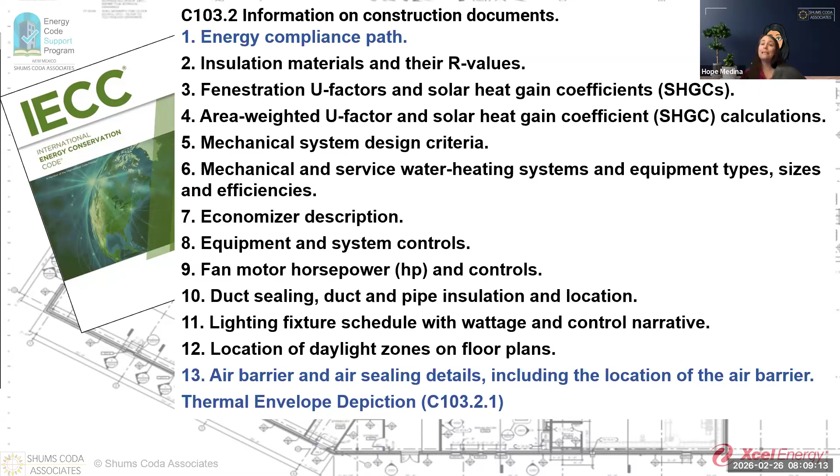All right, so here's the section that you all know I love and is near and dear to my heart, right? C103.2, because this is a section that talks about what needs to be placed on the plans. And a lot of times people consider this section as an architect section and the plans examiner section of the code, right? And the reality is, it's also there for when you're going out to do inspections, because if these items are not placed on the plans, they're probably not being done out in the field. And then you are not able to inspect for them. So while this does say information for construction documents, it is really helpful for you too.

And here are the items out of that section that really pertain to the fun and excitement that we've been talking about all month long. And that's our lighting, our electrical things. So number 8, I think, is often thought about as the mechanical ones, but we all know there's system controls that are required when it comes to the electrical and lighting side.

And then, of course, 11 and 12 are what we've talked about this month, just about all of the fun and excitement. We need those fixture schedules. We need to know how much wattage was designed. Is it permitted? Do we have enough? Do we have too much? Right? And our daylight zones. Troy had fun with you all last week talking about daylight zones.

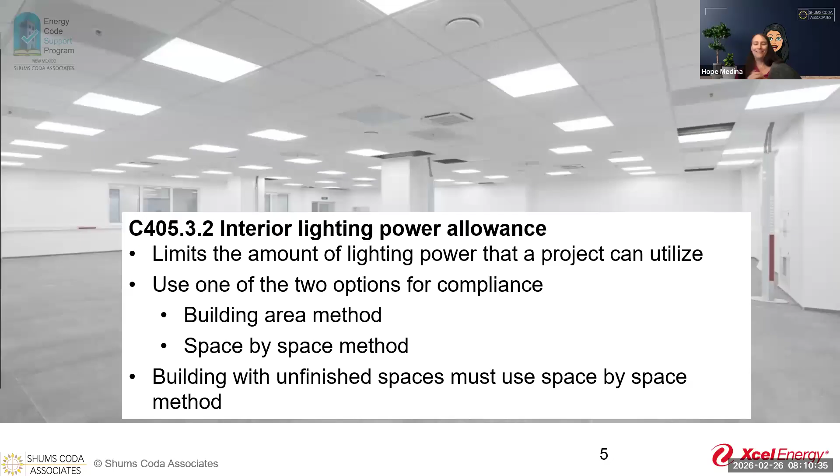So the first thing when we're talking about inspections, when it comes to the interior lighting power allowances, there are 2 options in there. But when it comes to inspections, whether they use the building area method or the space by space method, it doesn't matter too much to you, but what it does produce is this report if they utilize COMcheck to its fullest extent. They provide a report.

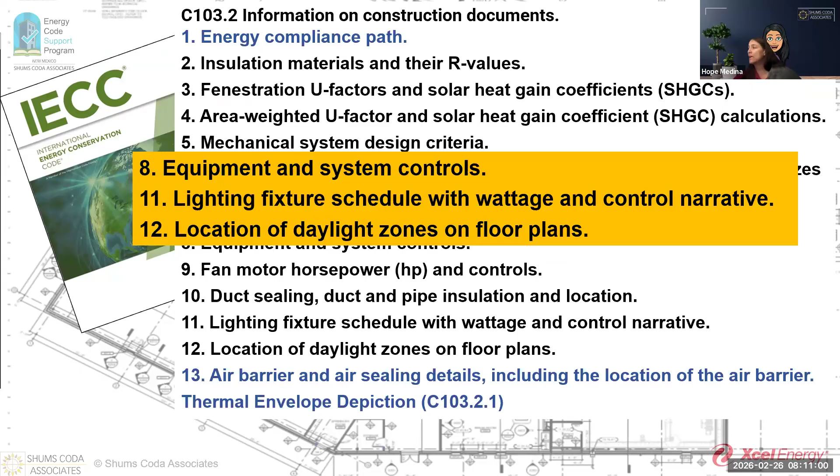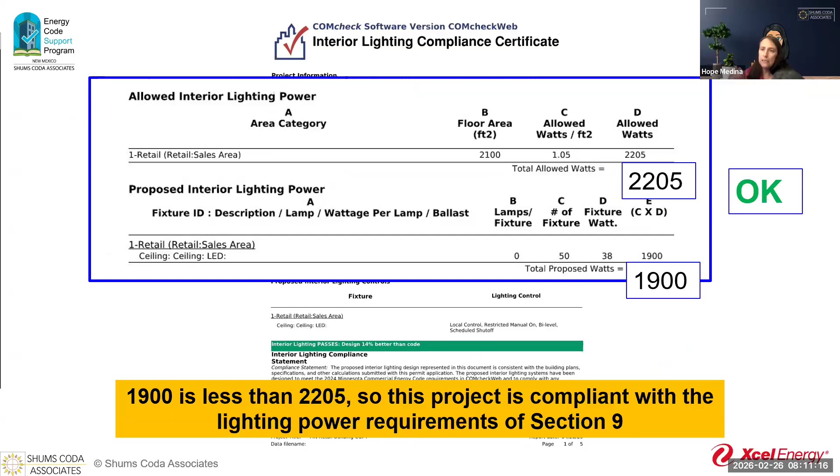If they don't provide a report like this, they are still required to provide you with the calculations. That's one of the items that's listed here. Number 11, lighting fixture schedule with wattage and control narratives. That's what COMcheck basically does for you in one easy to read report. So we know that we would look at this, right? All right, it looks like it's good. So this is something that's addressed at plan review.

But in turn, what it does for us as inspectors is now we have what we see on the screen here. And ultimately, what we would then do with this is it says in this room, I'm going to have 15 A lightings in there. When I go out there, what I'm doing for my amount of lighting is going through and counting how many fixtures are actually up in the ceiling or on the wall, wherever it ends up being placed, and verifying that that's what's going on out in the field.

And I know a lot of people are like, well, I don't think that that's necessarily an issue. But I know some of you have heard this story before. I had an electrical inspector who was like, okay, I got some stuff in the energy code, and he was trying to figure out how to incorporate that into what he was already doing. And he had a good plan going. So he went out there and he's like, okay, well, these plans show that there's 15. So he counted. There wasn't 15, there was more than 15.

So he started going around and he noticed that all the rooms had more lighting than what was shown on the plans. So he started doing his calculations, keeping track of how many of what fixture he had. He told the contractor, hey, I got to go back to the office because it appears you have more lighting and I don't know whether we can do it. So I'm not going to pass you and I'm not going to fail you. I'm going to go back and do a little bit more research.

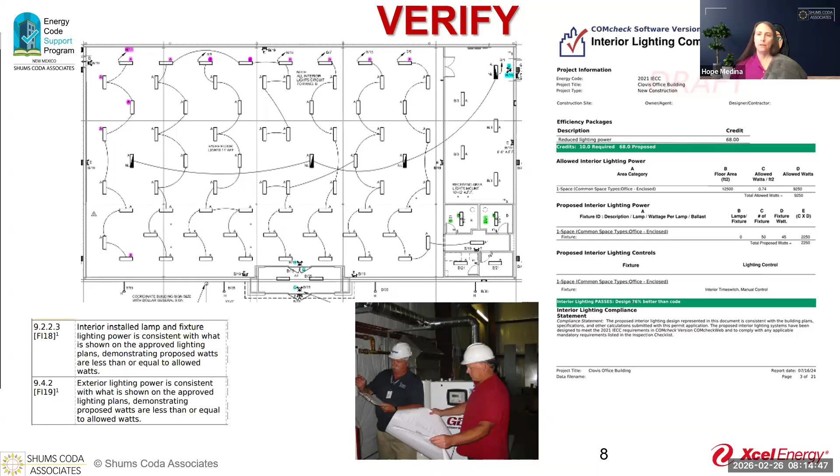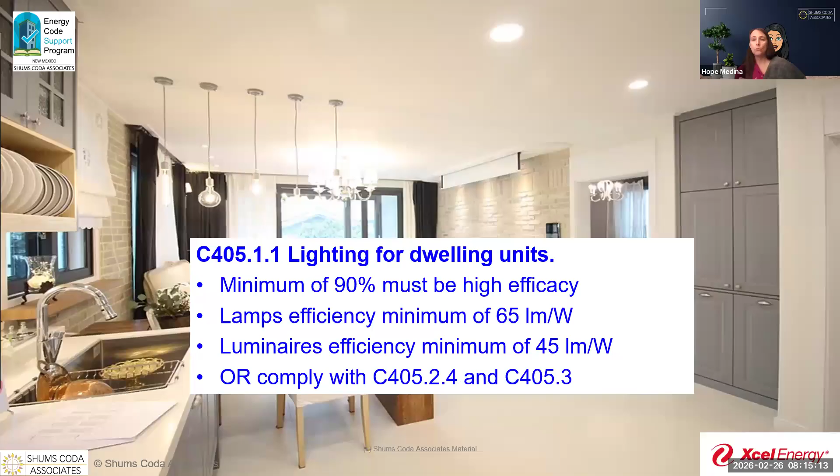All right. Now here's the really fun one. So we know that we're talking about dwelling units in commercial projects. So, your R2s, R3s, and R4s that are more than 3 stories above grade, right? In this instance, they have to ensure that 90% of their lighting is high efficacy per what the new criteria is in the code. So a lot of times people are like, well, what the heck am I doing? Am I just going around counting everything? And I think in the past, when we had that 50-50 split, there was a lot of counting going on. Now, it's not so much that you have to count all the light bulbs, right?

But what you may end up doing is obviously you're going to look through, and if you found lighting that wasn't high efficacy, that's when you're going to start paying attention. Otherwise, if what you're seeing is CFLs everywhere, some LEDs everywhere, then you would just kind of feel like, okay, we're good. But if you see an LED and then an incandescent, then an LED and then an incandescent, that's when I start worrying about having to count.

It's in the code. There's been so much with this, and the lighting industry has really taken hold of all of this. And, obviously, they don't want to produce something that they can't sell. And so that has helped our efforts as inspectors; while it's in the code, it's probably not as cumbersome or time consuming as you would think it would be.

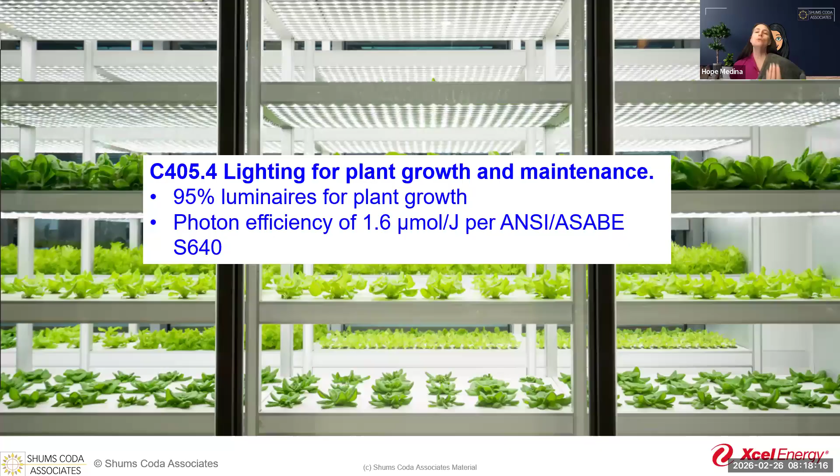Honestly, most of the time, that is what they're going to utilize, because as you can see on the screen here, often when they are growing plants indoors, it's dirt, plant, grow lights, dirt, plant, grow lights. So it's just this enormous stack, right? So they are utilizing a lot of lighting, and trust me, they don't want to spend an arm and a leg either. So they will be more than happy to be utilizing these. So again, while it is a counting game, I don't think that it's as much of a counting game as it may feel just looking at the code. Because once that information is out there, they're going to use the more efficient lighting, just as it did for regular everyday life.

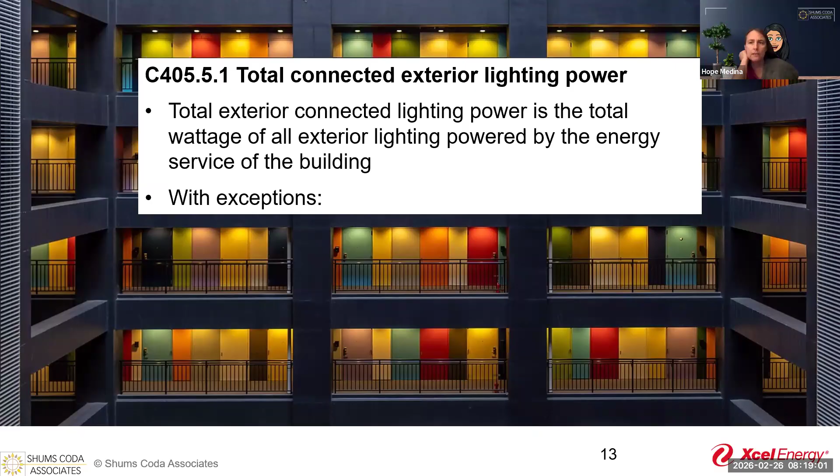Oh, hey, Troy, we got exterior lighting. It's kind of like our interior lighting concept, wouldn't you say? A bit, yes, except for the exceptions for stairs and egress paths. Yeah, our exterior lighting power density has a lot of exceptions, but I would say, just like Troy mentioned, there's some really common areas that all projects have, right?

They should all have egress. I guess I shouldn't assume, Troy, but I'm gonna go out on a limb. What do you think? Yeah, they should all have an egress out of there, and that needs to be lit up correctly. And that's that exception that says occupant sensors down to 50% in the egress path, then going back up. But with that, the lighting density per square foot based on how it's used, whether it's parking or entryways, that's huge on there as well. Absolutely.

Well, this again is where we have COMcheck that helps us to meet those requirements, right? It's a great tool to be able to have. So if again we look at a report, here's kind of what we're worried about and what we're looking at. So this, it's gonna actually work today. Nope. Okay. Oh, there it is. So here it says that they have 10 fixtures in their parking area. So ultimately, what we would do is come over here. We're outside. We can count that there are 10 fixtures, right?

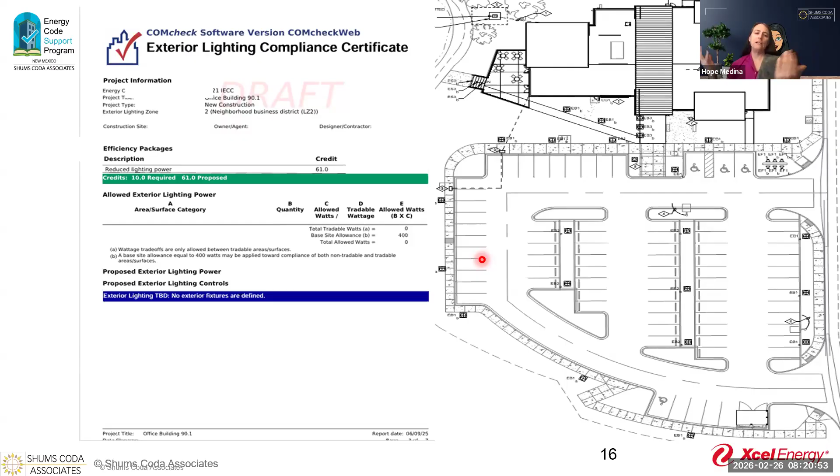So again, it's really fun to go out and count. It brings you back to your childhood. Brings me back to my childhood. What about you, Troy? Yeah, it makes me think of Sesame Street. One of these things is not like the other.

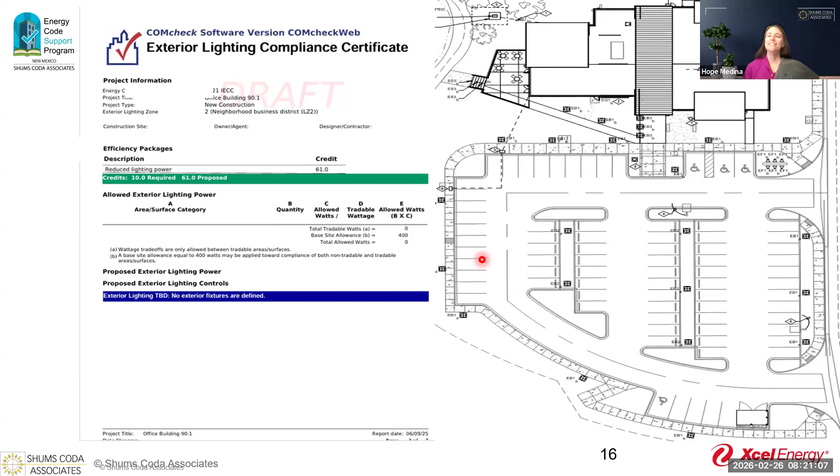All right, now here comes the lighting control criteria. As I mentioned earlier, this requirement for inspectors really does feel like a lot of stress. Now, I mentioned that we should feel like Christmas, right? The red book and the green book working together, or like red chili and green chili. I'm just saying. It would be great that the electrical inspectors are going out there and doing this, taking that load off because they're already looking at all these other things. But if it were to fall on a different inspector, maybe the electrical inspector is out for a week on vacation in the Bahamas, right?

Well, it's okay because the reality of this is when we're talking about all these controls, all you need to do is ensure that they are actually there. You don't have to worry about whether or not they work properly, but that they've been designed to meet the criteria listed in the code for their functions, because that's going to be addressed by commissioning. All of your lighting controls are required to be commissioned. So somebody else is going to verify that it shuts off 20 minutes after it's vacated, that it's been programmed for it. But it can't be programmed if it wasn't installed. So that's basically what we really need to do.

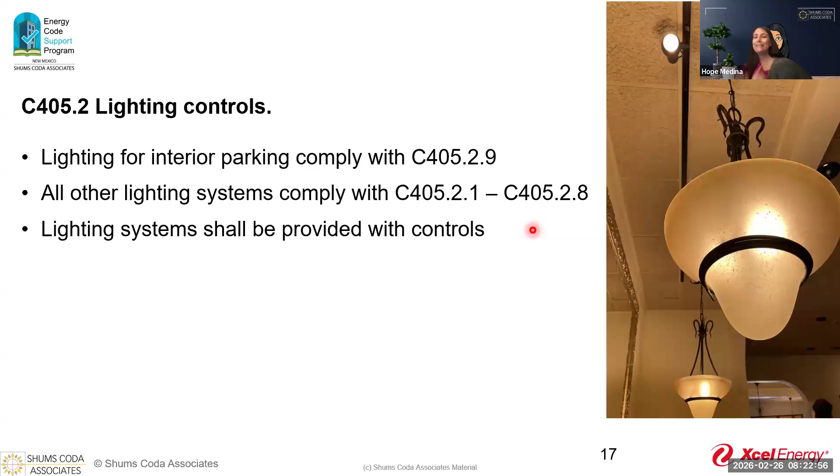All right. Troy, I'm going to ask you a really quick question. Are my slides still showing? Yes, they are. Okay. All right. Oh, there we go. Came back. Okay, perfect. I was trying to remember what the next slide was.

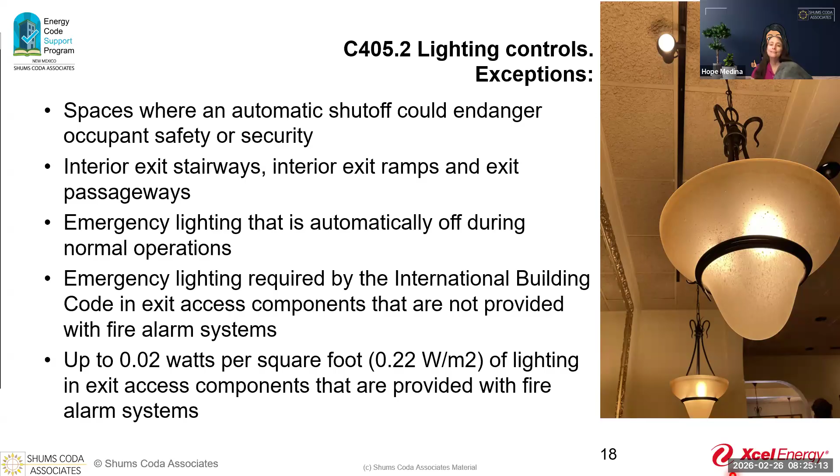So, oh, yay. We're just going to smile and hope that it works. There we go.

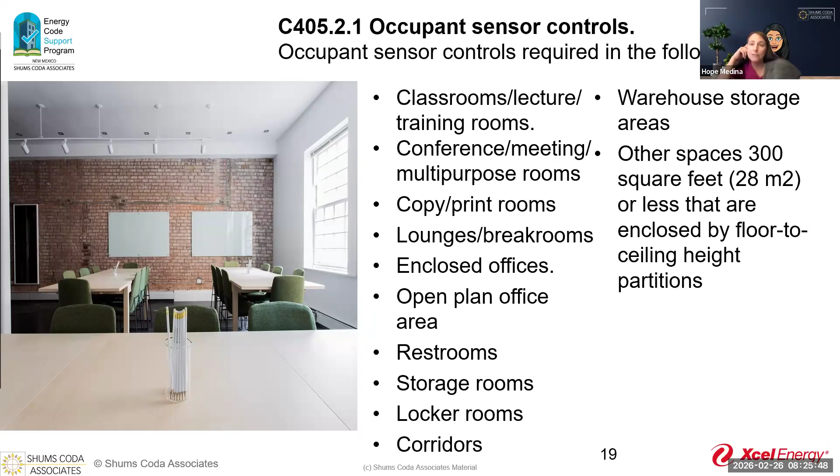All right, I alluded to occupancy sensors. Sometimes when we think of these, we think of occupancy sensors and that they turn on when you come into the room. And most of the time that's how they are. But they also need to have the function that they turn off, right? And that's what we are really concerned with. We want to ensure that all of these spaces have their occupancy sensors. And again, it's something that should be on the plans. And then what we're going to do is just ensure that they actually have been put in place.

Now, how they have to function is really kind of dependent on where we're looking, right? Anything outside of a warehouse, an open office, or a corridor, they're going to shut off 20 minutes after everybody's left. And then you're going to have a manual on or an automatic turn on that goes to that 50%. And then have a manual control that allows those occupants to be able to turn things off.

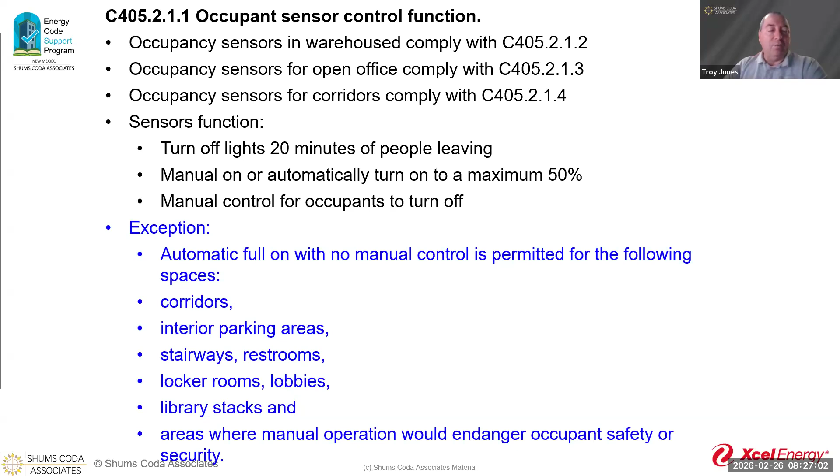What do you think, Troy? Have you had a lot of fun with occupancy sensors out in the field? A lot of fun, and the even more fun part is trying to find the manual overrides. Because depending upon where the building is and how it's zoned, I've had the overrides actually outside of the office areas. So you had to hit a button or turn a key on before you walked in. So those are things to remember when you're doing your inspections to verify that it's working.

Yeah, I didn't even think about that. See, Troy, amazing you are here today.

All right. Well, I said except for warehouses and open offices and corridors, so we might as well talk about them. So our warehouses, this is almost a fun one because if I were going out and doing an inspection for a warehouse, you have the aisles, the open area, and the aisles have to be independently controlled. So to verify that, I think it would be fun to run down an aisle and see what lights pop on.

And when I say run, we all know how well Hope runs. So that in itself would be fun for all those there to watch. So I'd be the entertainment for the day.

So again, that would be what I would look at because that lets me know that the sensors are there because they are functioning, right? They're turning on. They aren't going to probably turn off, but I'm not worried about them turning off because in those instances, more than likely, they're more than a few feet above my head, probably 20, 30 feet above my head in some instances for a warehouse. So to me, putting the fun in inspections, that's how I would go about it. I know that it turns on.

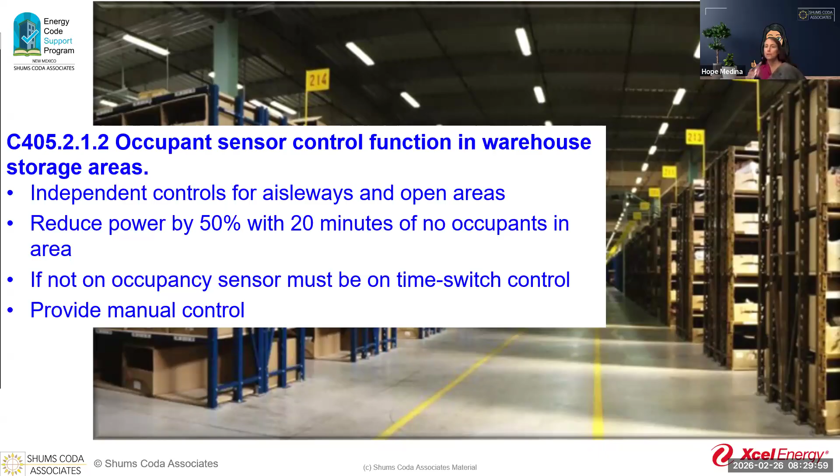Thank you. I get lucky once in a while. Oh, you get lucky more than once in a while.

All right, occupancy sensors. So when we're talking about open offices, that's always a fun one because a long time ago it said offices had to have occupancy sensors, and then the whole new fad was to have the open offices. So how do you deal with that? Well, let me tell you. If that space is less than 300 square feet, then you're going to just have the normal occupancy sensor requirements into it.

If that space is more than 300 square feet, now you are going to have an occupancy sensor that after 20 minutes shuts off the lighting for it. You're also going to have some controls, basically like a dimmer, so that it reduces down to 20%. It can't go less than that, so it's not shutting it off altogether. It's just reducing the amount of lighting that's in there once everybody has left that zone.

So with the zones, each zone cannot be greater than 600 square feet. They can make them smaller, like 100 square feet and 100 square feet and so forth. The designer can do that. They just can't exceed 600 square feet in those zones.

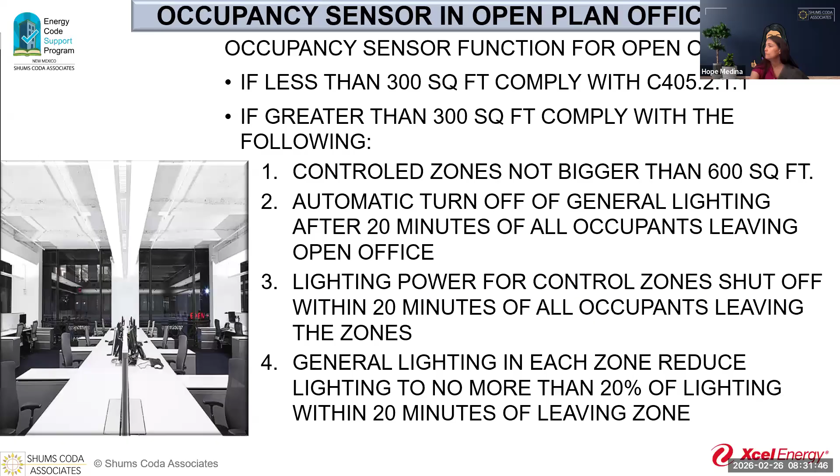Now, corridors is one that everybody has a lot of heartburn over. And don't get me wrong, I have a little bit of heartburn about it too. But what I will say is the lights don't completely shut off, right? They're only going to 50%, and they're going to be reducing uniformly so it doesn't feel too bad. Now, the lighting in the corridor is typically excessive. If you think about a hotel, that sucker is lit to the nines, right?

But if by chance it happens to have less than 2 foot candles, then that reduction doesn't have to happen. And that's because we're required a certain amount of foot candles for our egress, which you guys all know because we've been talking about egress today.

Feels like an egress Thursday. What do you think, Troy? I think it's an egress Thursday, and the question I always got is, what's a foot candle? Oh, so that's that funky shaped candle. It's really cool. The middle toe has the wick, and they say it's how many wicks per toe.

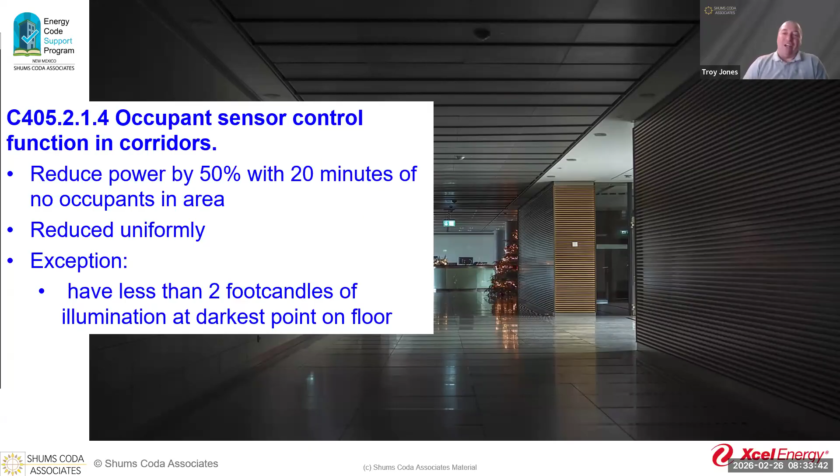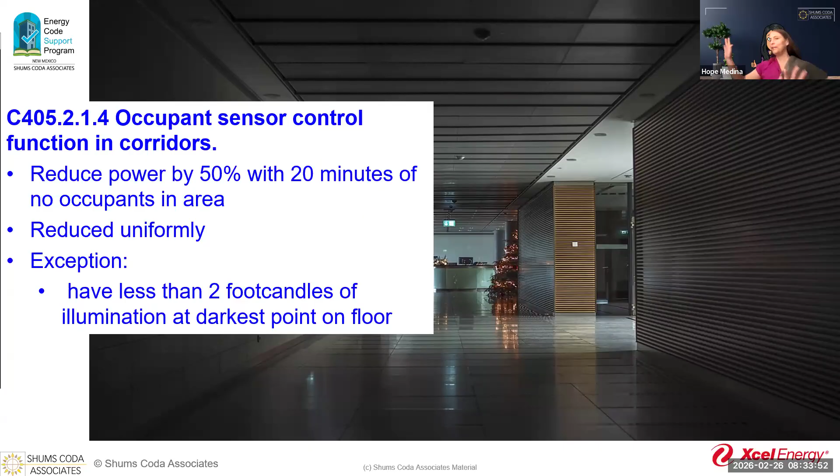See, we got somebody who wants the foot candle. Maybe we found our new calling in life. Foot candles. New side hustle.

All right. Getting to the time switch that Troy was referring to earlier. If it's not on an occupancy sensor, it's got to be on a time switch control, unless, of course, it's going to endanger the occupants. There are some exceptions for it. The big one to remember is the shops and laboratory classrooms. If you're doing schools, we want to make sure that lights aren't shutting off as they're using their Bunsen burner, or because they are going to follow our footsteps and get into the construction trades because they know how great it is.

And they're using the table saw. Next thing you know, they have created something beautiful, a 4-fingered hand. So now that foot candle has a 4-fingered hand that goes with it.

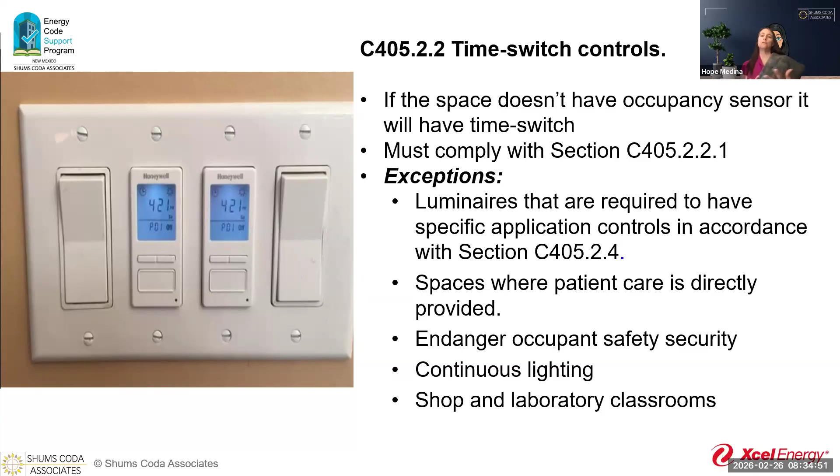All right. So again, this is one of the ones that people get, I don't want to say stressed out, but concerned about, when we talk about the requirements for time switch control. All of this should be listed in a sequence of operation on the actual plans. What you want to know is, is there a time switch control that's been installed in this location for the lighting system?

And so when I go out and I'm inspecting this out in the field, I always require for this part of the inspection the installer, somebody there that's going to show me where this was placed, and not so much that it was programmed, but that it is there and it exists, and where the override controls are going to be located, because as Troy mentioned, they're not always right in the room with you. A lot of times it's in a centralized location.

And I think we've seen those where it looks like a light switch, and then it has the little elongated rectangles, and it has some information that you would do with it. And then one is controlling the vestibule, one is controlling the office, one is controlling the hallway, right? So there might be one centralized location that's the control panel for multiple locations within the immediate area, right?

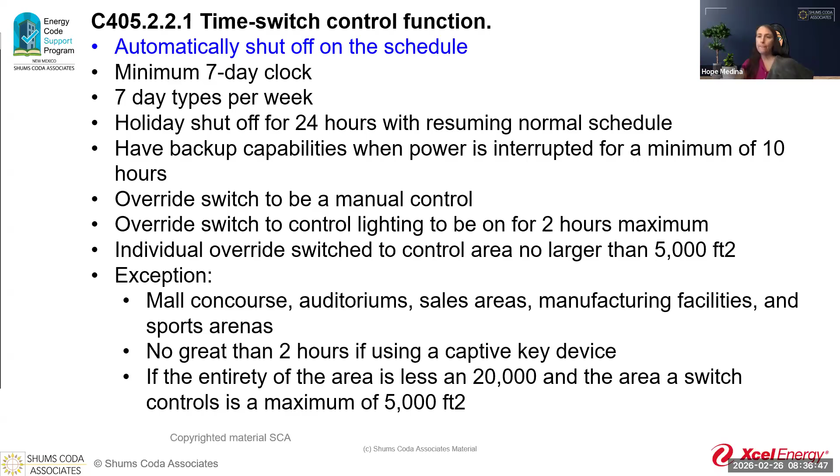So in this instance, since I have the installer, the contractor there, I say, where are your daylight responsive controls? Then they can show me here's where the control panel is. Well, I'm just going to call it a control panel, but here's where the controls are, and here's the sensors that are located up in the ceiling. Typically, I can see the sensors up in the ceiling. What I need to know is, where do you have the actual controls?

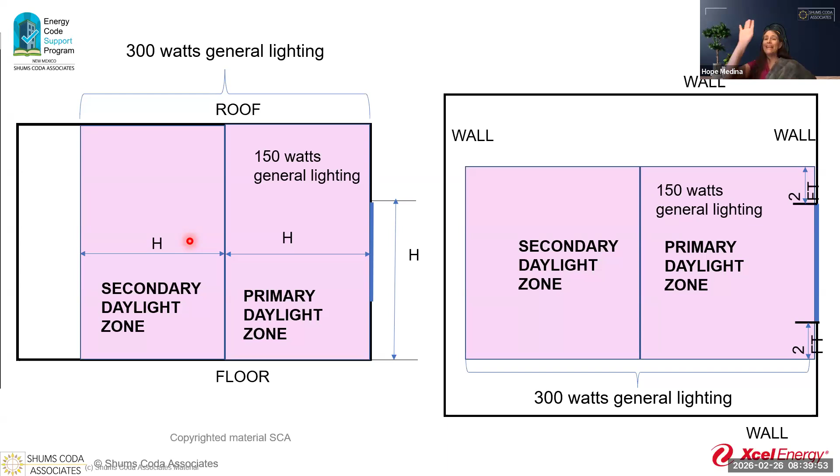Now, what we have on the screen is how they determine the sidelit, daylit areas. These are required to be placed on the plans. The reason I have this in here is to give a generalized idea of what they're talking about controlling: there's a primary and a secondary. So when you're looking at these controls and they say, this one is controlling this window and this one is controlling this window, okay, so we have primary and secondary. They have to be on their own devices, right? So we have to ensure that we have the controls for the primary and secondary. They're not combined anymore.

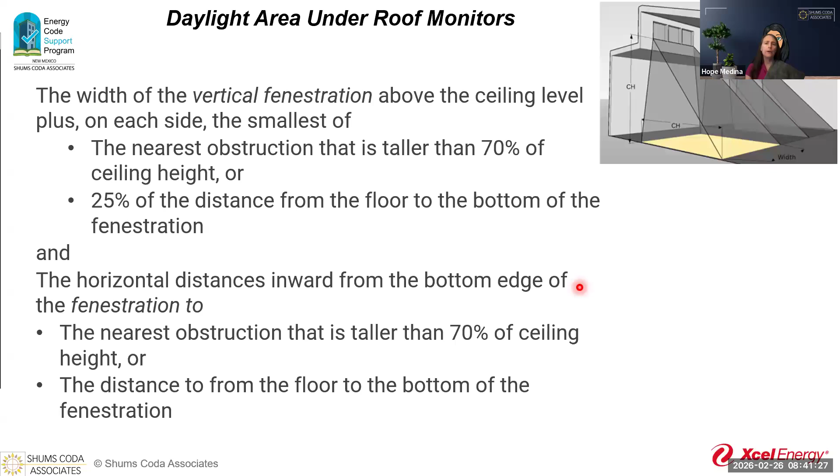And then I see we have a question. Can the controls be located so the office staff does not alter the settings? It still needs to be in an accessible location, as Troy had mentioned, and it has to be clearly marked. Typically, it's got to have the continuous dimming and then controls that are going to shut off all of the lighting. But it doesn't necessarily say that it can't be in a location where the staff would be able to alter it, but it would be kind of difficult for them.

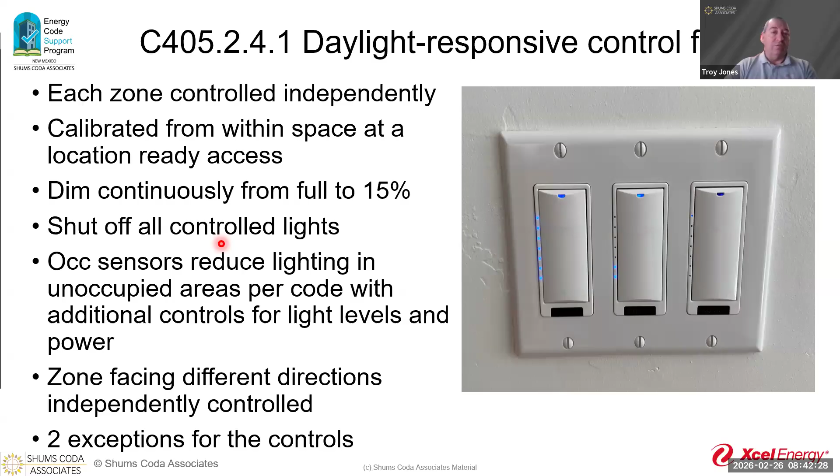On a lot of these, yeah, because the controls are computerized, they have an app that works with them to help facilitate setting these up. The older ones are analog, so you are able to make those adjustments, but the newer ones coming out are digital, so you can work them off the control system for the whole building. So even though they're located in the office for the occupants, they really can't mess with it. Yeah.

All right. So atriums. This is a fun one. A lot of people get a little... We've got Carl with a raised hand here. Oh, I'm sorry. Carl, go ahead. Have a chat.

You should be unmuted where you can ask your question. Okay.

Okay. The question is about whether the controls can be placed so that the office staff doesn't alter the settings. The issue comes into a competing code where accessibility standards require at least access to the switches within the reach ranges. So yes, they can be computerized so the settings are established within certain ranges, but the controls themselves still have to be accessible. Does that make sense? Oh yeah. I mean there are some criteria with that, right?

So you are right. We have a multitude of codes that all have to play in the sandbox together, and we have to figure that out. Now, what this code is saying is they made a conscious effort, because it used to say that it had to be accessible, meaning it just had to have the ability that you could have access to it. Now they changed it to be ready access. Pretty much everything is ready access. The reason is they want to ensure that those controls can be accessed without having to climb a 10-foot ladder to get there.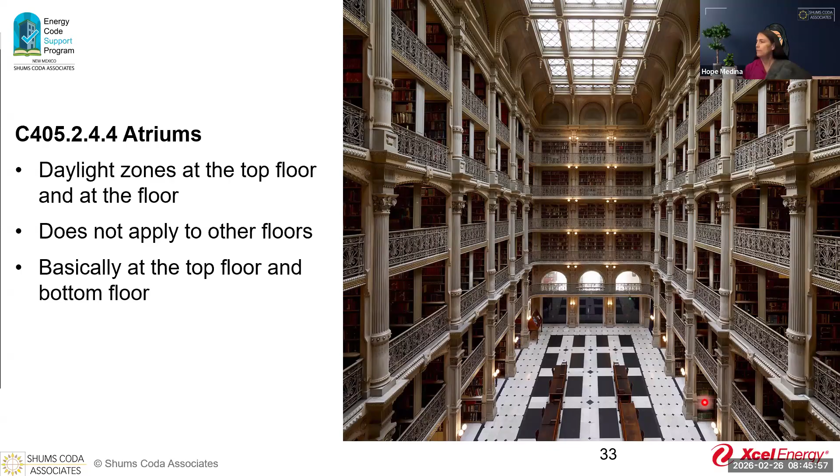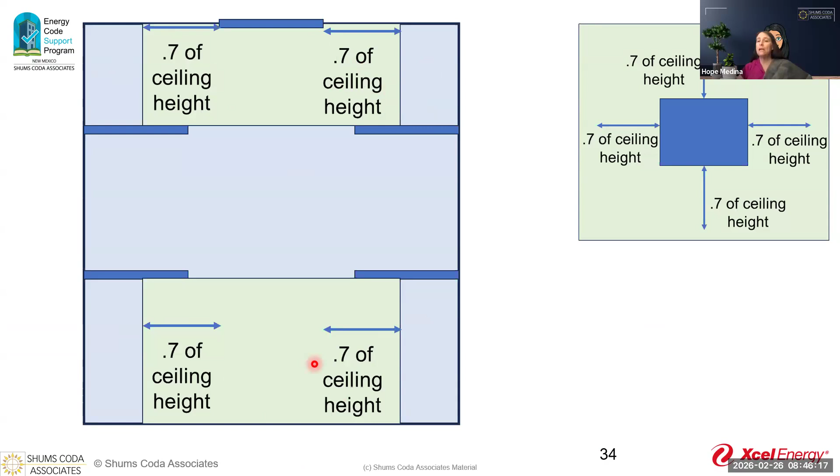All right, atriums. So this is a fun one. You have a very unique setup as far as the daylight zones for them. You have your daylight zone up here and your daylight zone down here, so you're going to have some sensors potentially up on the top floor and sensors down in the atrium itself to help monitor for those things.

Now, the specific application controls: while this is in the code, a lot of times it's not necessarily a separate sensor that has to be installed. These are now kind of built into the items that are required to follow C405.2.5, like display cases. Some of the supplemental task lighting is already utilizing it. The lighting for plant growth and food warming probably doesn't have it, and the task lighting for medical and dental purposes might not have those occupancy sensors.

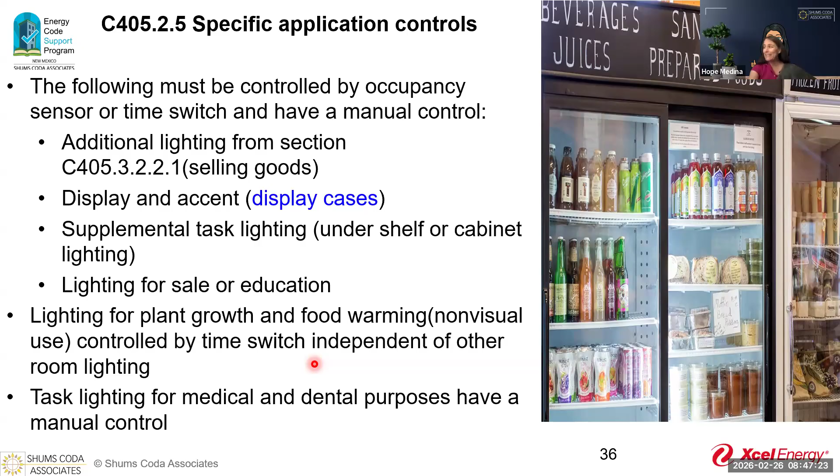But we do have some instances where it's starting to make its way in. So all we have to do is ensure that it's in there, and then the occupancy sensors and time switches are going to be addressed as far as functionality with your commissioning.

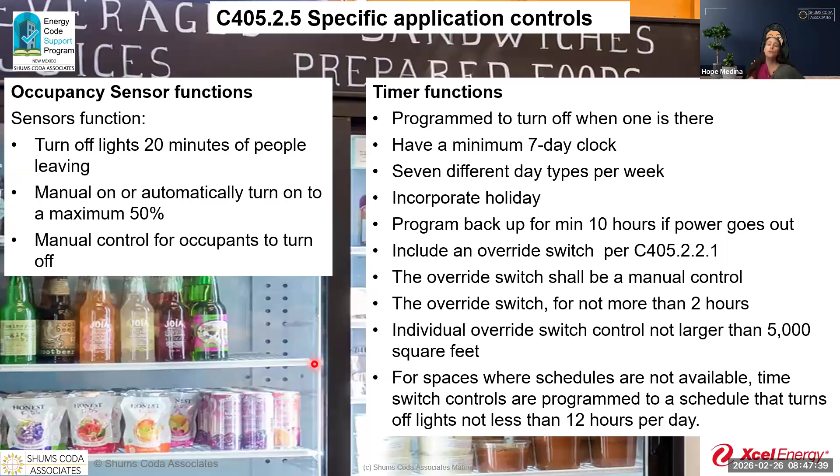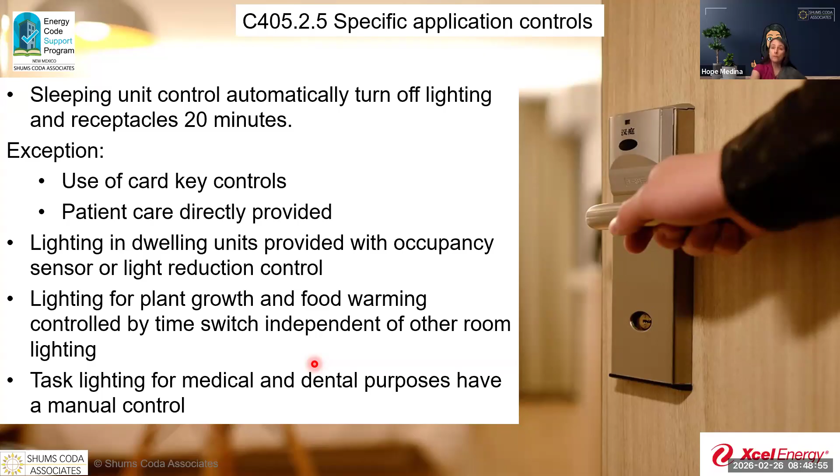There are further exceptions: the task lighting for medical and dental purposes, plant growth and food warming, and lighting in dwelling units, because that's already addressed in a separate section of the code. Then we have the requirement that you have to have manual controls. The nice thing is, I think we've all seen those manual controls, and it's not as cumbersome. That's probably the one thing we've seen over and over again.

I always like to put this one on here because remember it said you also had to have something at 50%. So I talk about how they label things. This is on, this is off, and they call it AV mode. AV mode was where every other light was on.

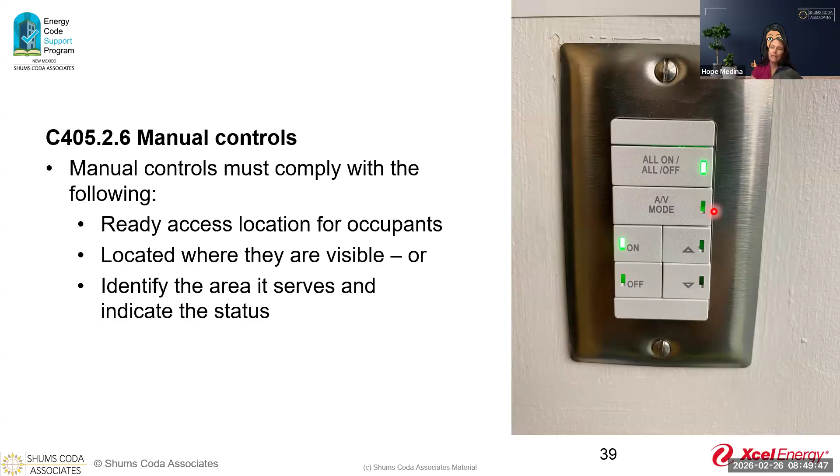And I thought that was actually kind of unique because sometimes it's how you present something as opposed to, oh, you must. So that's why I have that one in there.

All right. We can't leave the outside alone either. They need to ensure that they are meeting the criteria for exterior lighting controls. So the one thing that it says here is that covered entrances, vehicle entrances are exempt because they have their own criteria for this, so that it addresses things like eye adaptation, because I think we've all been outside, it's a beautiful day, and then we go down into the parking garage, and it is pitch black because your eyes are just not adjusted yet.

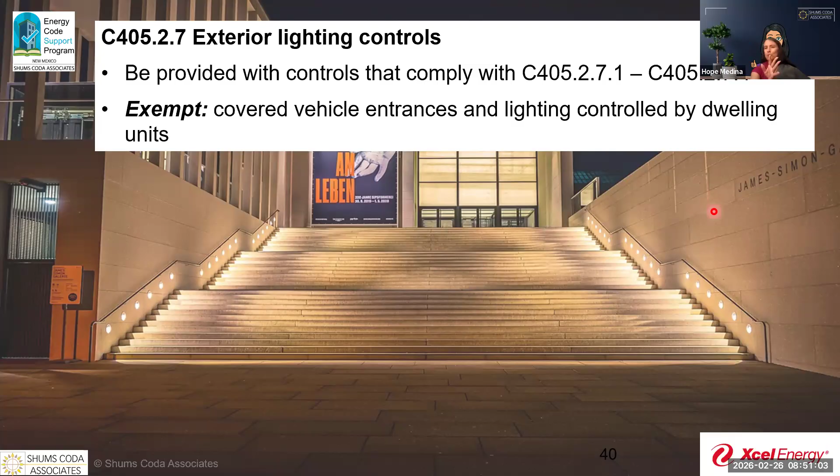And I don't know about you, but I put on my brake because I don't want to be on the news for being that person that hit somebody walking in front of the parking garage. So I close my eyes a second. I'm like, oh, amazing. Now I can see a little bit better. And so what they've done is they've created a way that you don't have to stop your car and close your eyes to adjust. It's allowing for an adjustment.

Building facade. Again, this is where it gets to be complicated because, I'm going to just ask by raise of hands. How many of you go out and do inspections at 5 in the morning to see if these lights are turning on or off? Anyone? Anyone? Bueller? Bueller? Nope, not even Bueller's doing it.

Carl does? Oh, Carl does. Oh, good job, Carl.

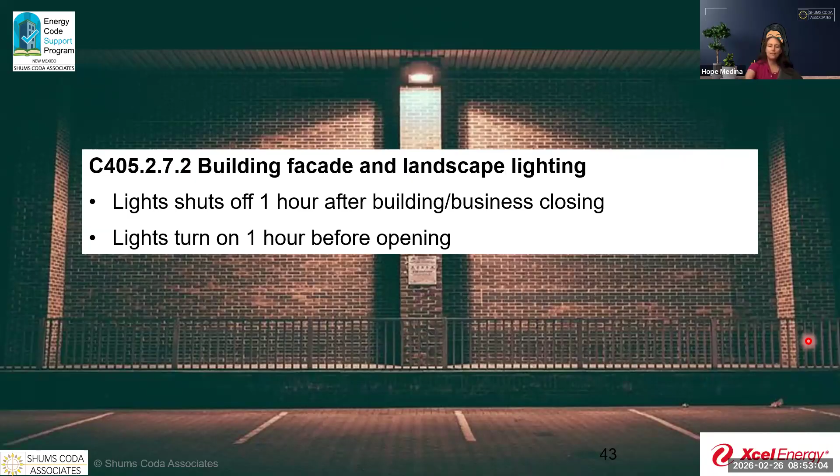Yeah, so this is one of those times that we definitely are going to have to rely on the fact that these are being addressed. Now, sometimes you might luck out that you could see it shut off because maybe you're driving home from work and you know that they're building and the idea was they were shutting off at 5. Unfortunately, you had to stick around because you had a council meeting and you could see at 6:20 that those lights are off. But otherwise, that commissioning agent is going to be your best friend when it comes to lighting. And I'm just telling you, lighting and electrical.

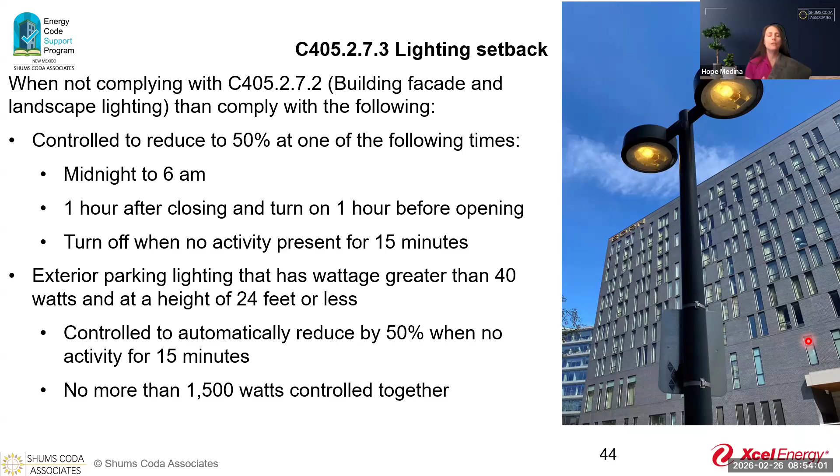Now all of this information is kind of complex, but this is where those plans are really going to play a huge role. And so again, you're going to ensure that whatever they say, if it's on a timer, if it's going to be on occupancy sensors, whatever it happens to be, you are just going to ask the question. This is how I address it. Ask the question, where is this timer located for this lighting? And they're more than happy to take you there because the reality is they want to pass their inspection and they don't want to wait all day on me either. If there's a way that we can work together to speed things along, they're more than happy to do it.

And then here's one that we all just love. Exterior lighting inspection is typically part of the punch list for issuing a substantial completion certificate. Oh, okay. Well, that's a very nice thing to know. I know for me, that was never an option. I had to go out and ensure that all of that was there. So that's kind of cool.

I have one that shows blue and so forth, but I can look around and kind of guesstimate that we are at 50% of all of these. And I can pretty much guarantee you are not going to find ones where 75% of the room is going to be controlled receptacles. You're probably going to find that maybe they're only at 40% of controlled receptacles. So that's one that I think is almost a slam dunk in the sense that it's so spelled out for anybody. I can look for a dot on a receptacle.

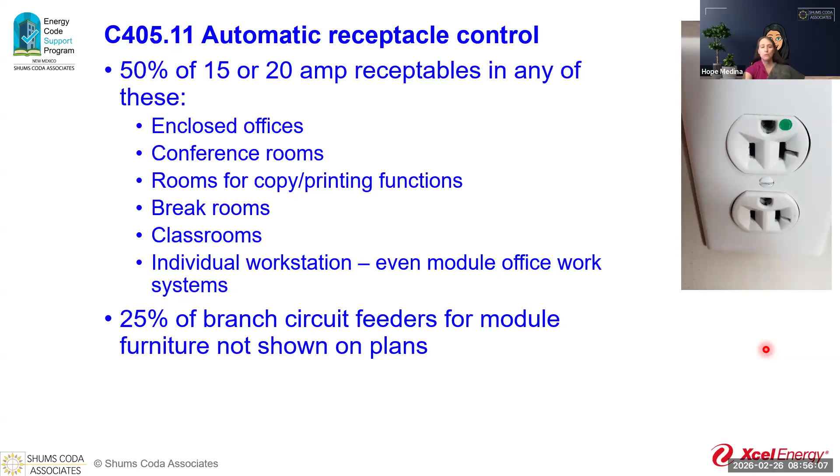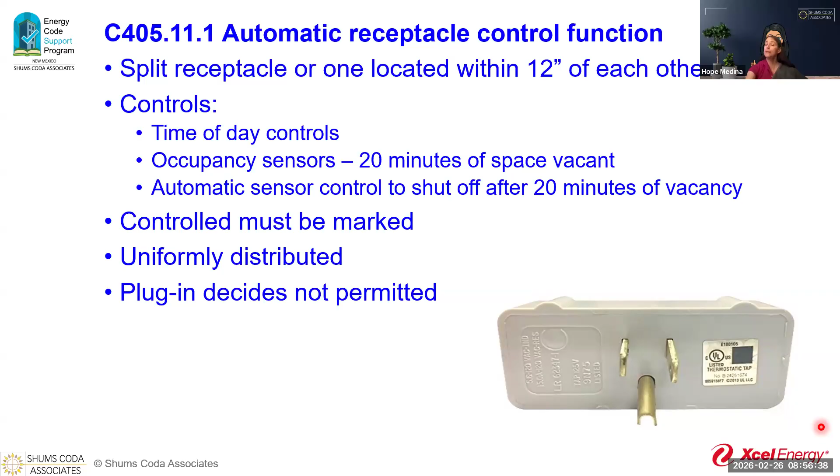I don't know about you, Troy. What do you think? Well, usually what I do when I walk in on those is I ask the contractor, "Hey, how did you signify which one of these is controlled and which one isn't?" That way, I get them to help me out: see, there's one over there, there's one over there. It's blue, it's green, it's orange, or I've actually had the outside trim plates be a different color. Oh, yeah. I haven't had that one. That would be a good one.

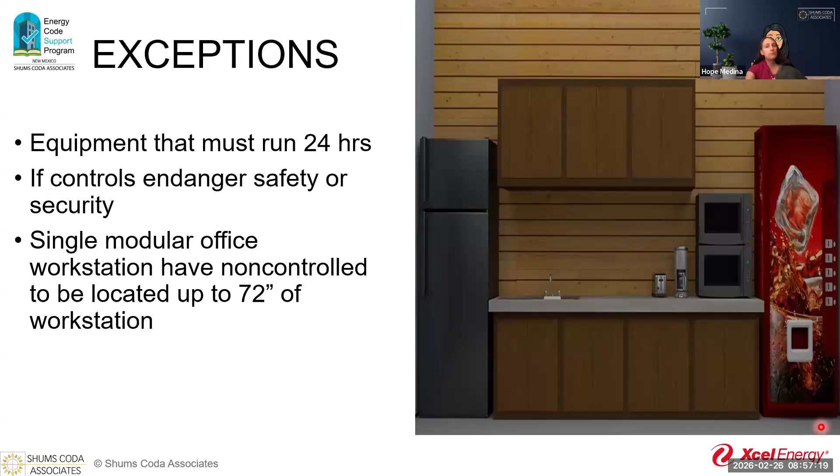Now, the one thing I do want you all to remember is there are some exceptions to this. So, break rooms, I think it would be really poor judgment to have the refrigerator plugged into a controlled receptacle, or even the vending machine. And anybody who knows me knows it would be poor judgment to have that coffee maker placed on a controlled receptacle. So just keep in mind there are some exceptions to all of this, because that's just the reality. And like I said, lovely green dot. This one's green. I should have put in the blue dot so that everybody could have seen that there are different colors out there.

Now, one that most people probably are not exactly aware of is that elevator cabs actually have criteria for energy efficiency. This again is something that is going to be placed on the plans, which often refer to the spec book, quite honestly. The luminaires in an elevator cab have to be not less than the 35 lumens per watt. The ventilation fans in an elevator without air conditioning can go all the way up to 0.33 watts per CFM at max, and then the controls are going to de-energize everything when it's been inactive for 15 minutes. So often a lot of this is looked at with the commissioning agent, and a lot of it is looked at with the plans examiner, because they're going to catch this stuff at the beginning.

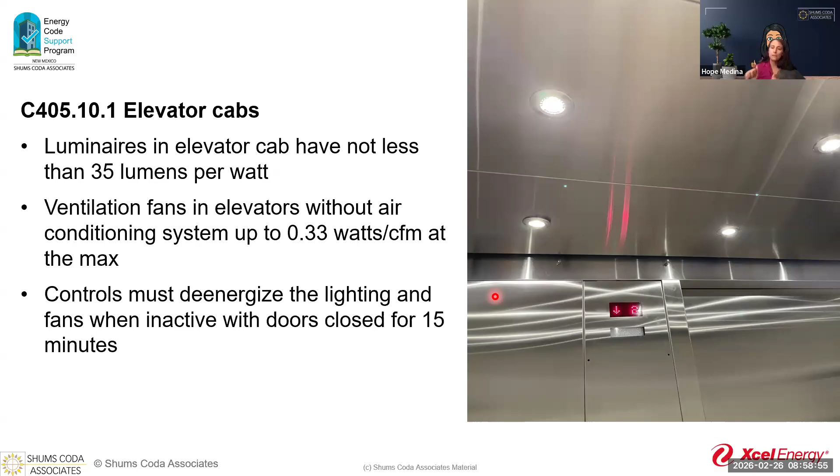And quite honestly, elevator cabs now are kind of, I don't want to say prefabricated, but a lot of this is already being done with them. So some of it is stuff where you're going to just go out there: okay, so what do we have in there? Great. And we would kind of call it good there.

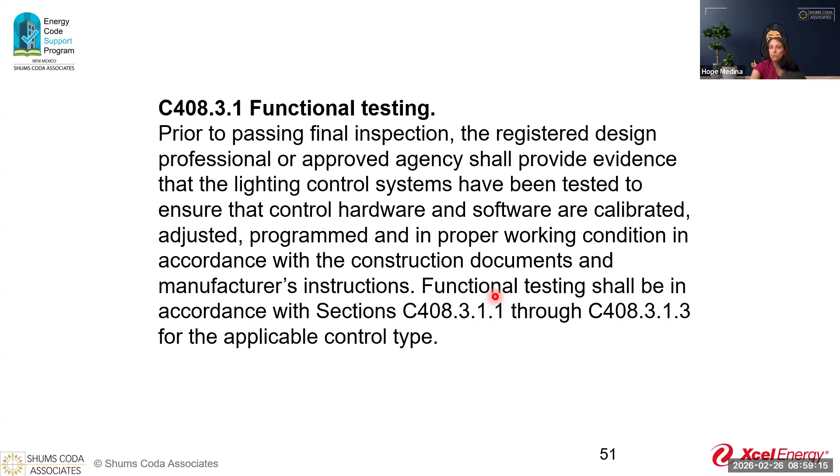Now I know we're getting to the very end here. So here becomes the fun thing: whose responsibility is it to inspect what? This is where we want to ensure we understand, as I've alluded to and Troy's alluded to, we have commissioning. We are a team. Remember, we are always a team. And our team is, we partner with our functional testing agencies, our commissioning agents. They are going to take care of all the functioning type of controls for us.